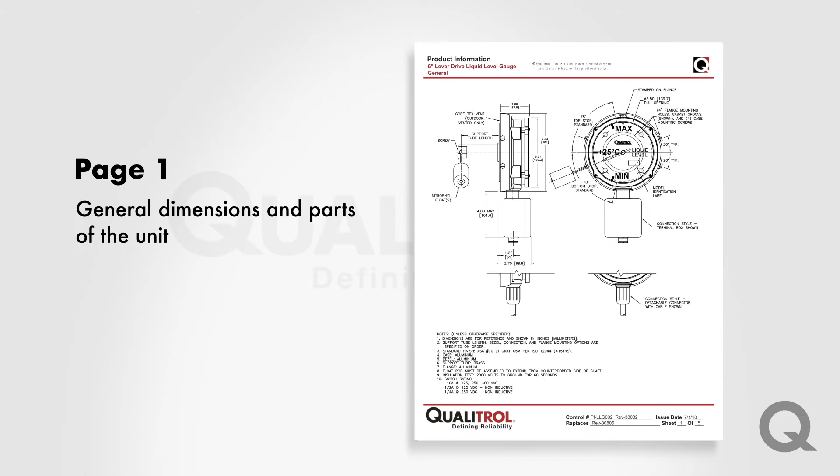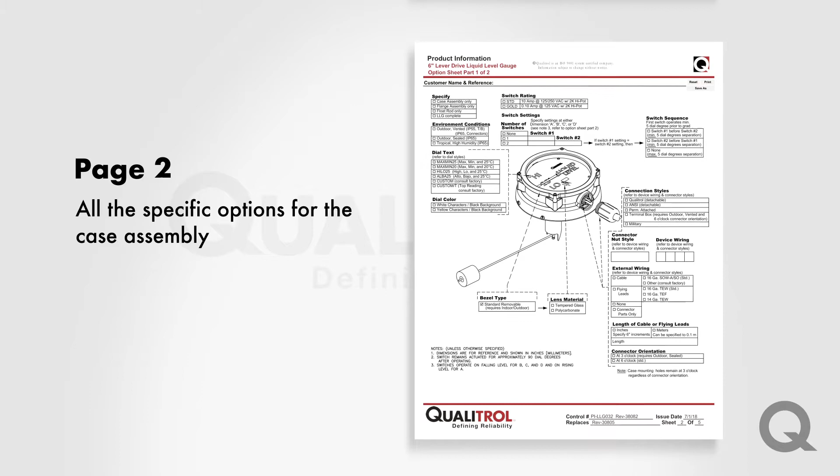So in the first page, you have the general dimensions and parts of the unit. The unit is divided in two main parts or assemblies. This is the case assembly, where the switches are located, and then we have the flange assembly, where you have the flange and the float rod. On page number 2, you can find all the specific options for the case assembly, starting by specifying what it is that you need. Do you need just the case assembly? Do you need only a flange assembly? You just want a float rod or the complete unit?

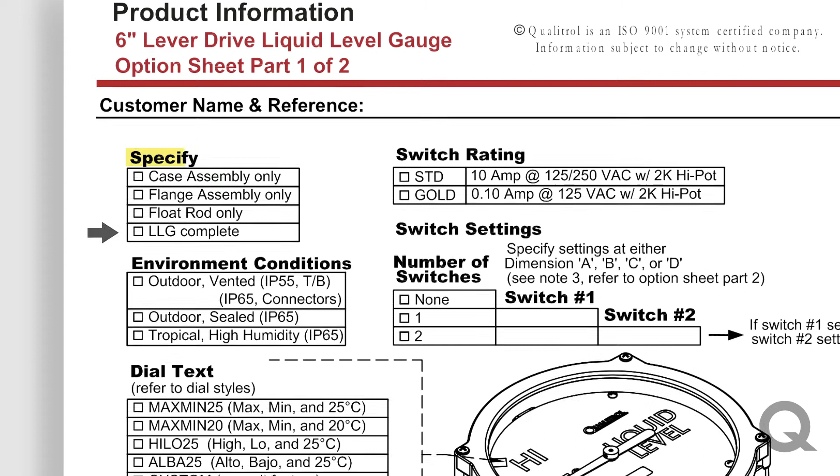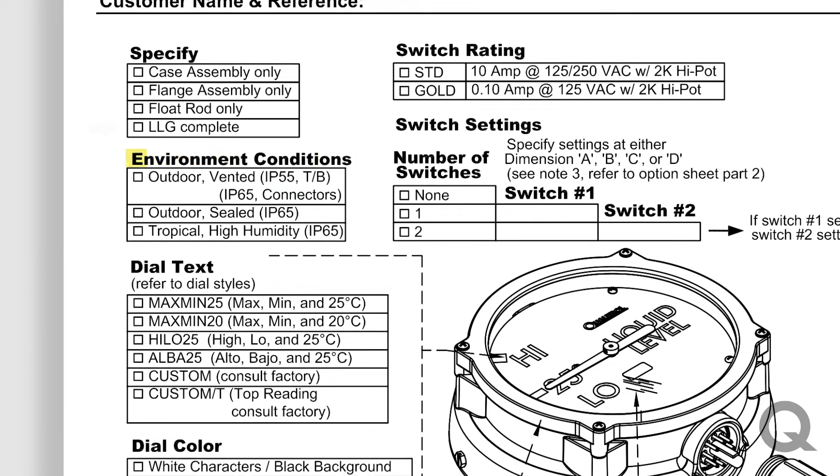After that, we have the environmental conditions. So will this be a standard environment, or is it going to a more aggressive environment? Do you need extra protection? Then you have the dial text. This is basically the indication that you want to see on the unit dial, and also the colors for the dial. You can also find the switch setting. So where do you want those switches to go? In your angle A, which is your maximum, angle B, or angle C or D, if it's the case. And we'll talk about those angles later.

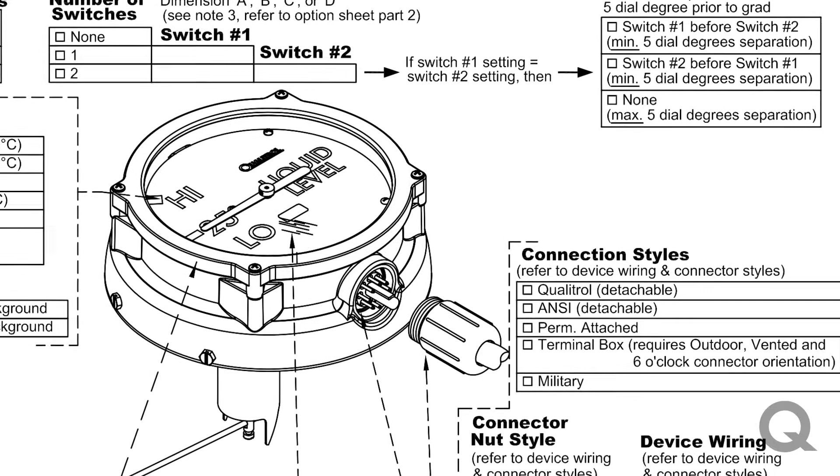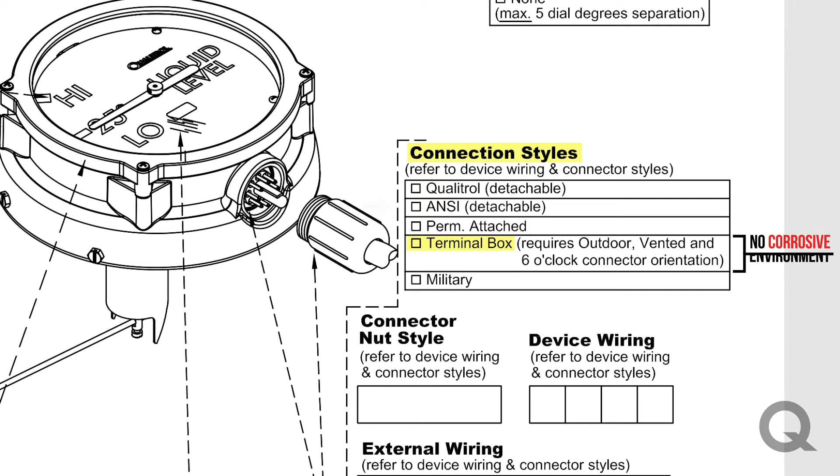You also have an option of the switch rating that you need. We have a standard and gold. So the gold option is basically when you don't want the same voltage, you want something lower, and this is usually for high explosive environments. We also have options for different connection styles. This could be Qualitrol, terminal box, ANSI, and others. Just make sure that if you are choosing terminal box, you don't have a corrosive environment, because that combination won't work.

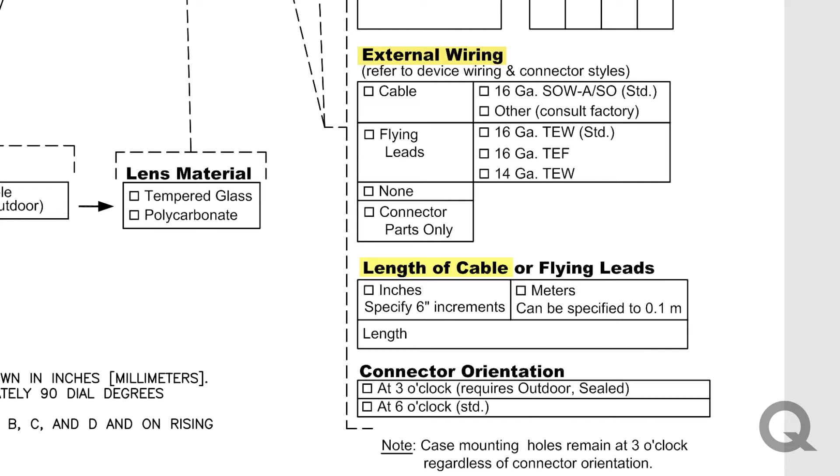Also, you have external wiring. This is, do you need a cable? What type of cable do you need? What length of the cable? And what type of orientation do you want? 6 o'clock or 3 o'clock? Okay, now page number 3. Page number 3 has all the configurations for the flange assembly. And this is related to your tank, your transformer tank. So this will usually be filled out by your mechanical engineer or whoever is designing the tank.

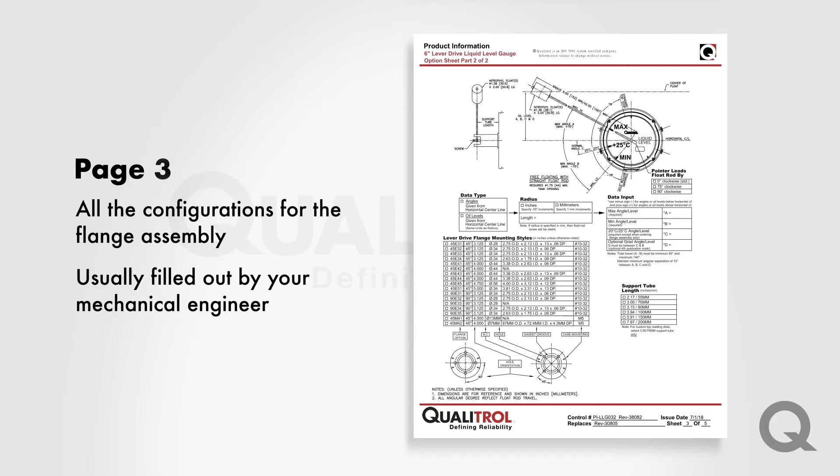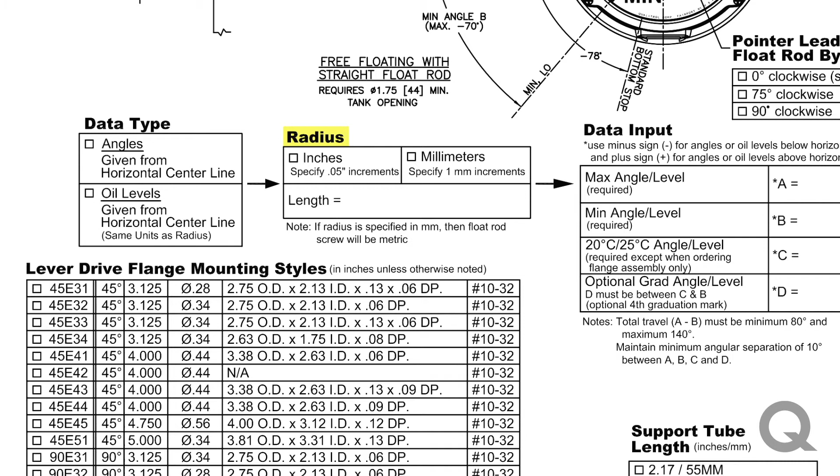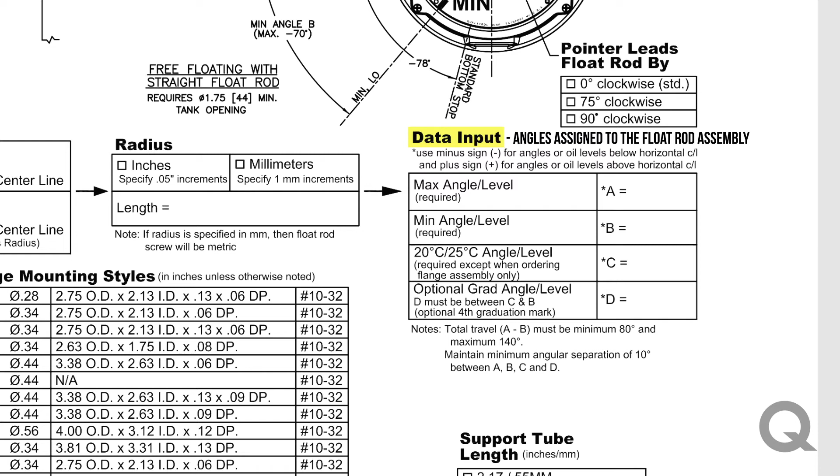So first, you have the data type. Do you have angles or do you have oil levels of the tank? After that, you have the radius. So the radius is basically the length of the float that you will be using, and you can give that in inches and millimeters. After that, you have the data input, and the data input is basically the angles that you're going to be assigning to the float rod assembly. Just make sure that you don't exceed the maximum angles, and you can find the information on the maximum angles right on the third page of our configuration form.

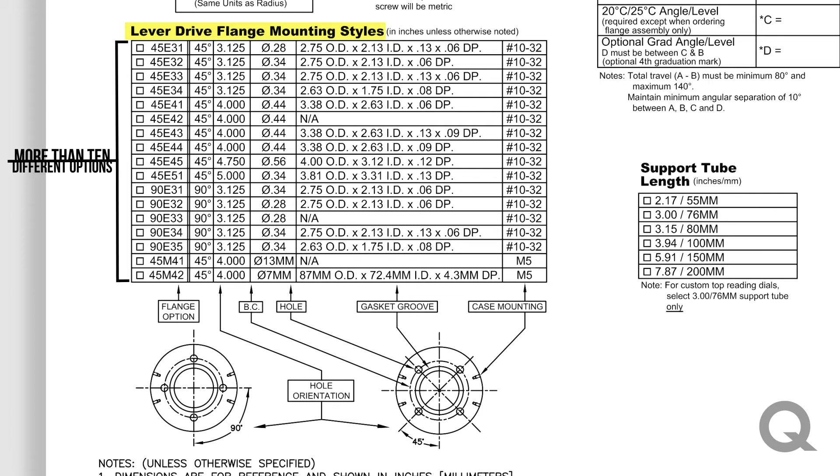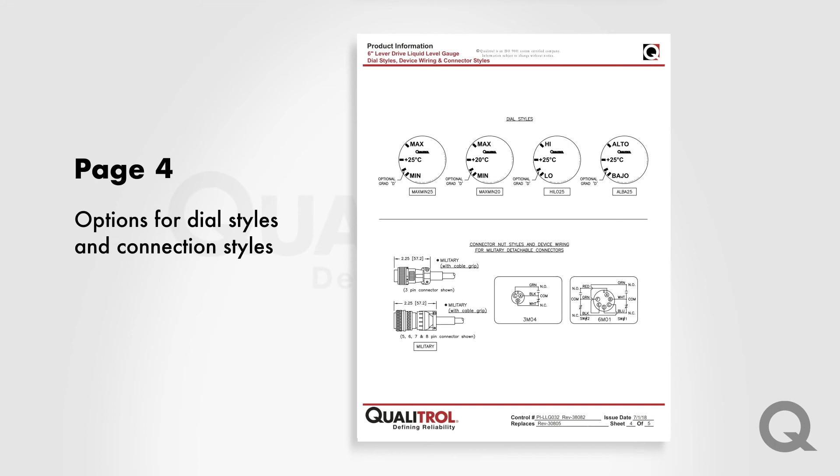You also have options of the flange mounting style, so you can choose among more than 10 different options that we have, and also the support tube length. And that's pretty much it for the configuration and the options that we offer. On page 4 and 5, you can find a visual of the different options that we have for both the dial styles and the connection styles. Okay, so that's it for our configuration forms for our liquid level gauges.